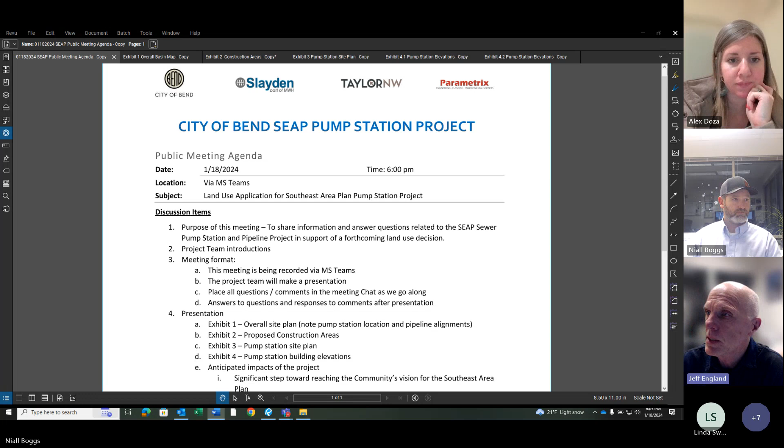We went through an alternatives analysis looking at different pump station locations. The city decided that's the preferred location because it serves more area in the basin than any of the other locations we had looked at.

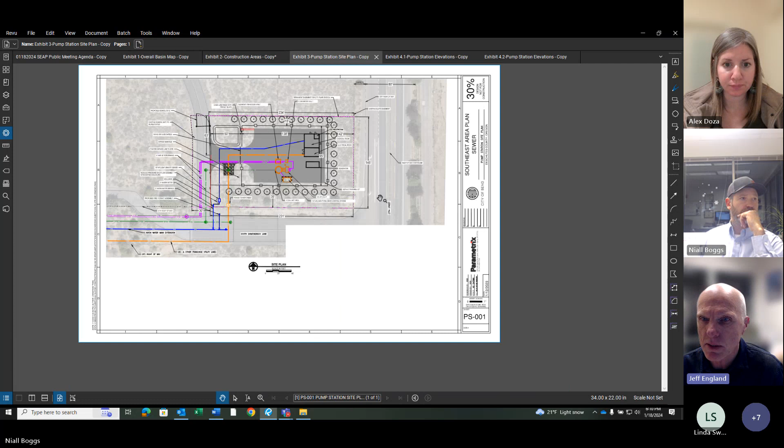So zooming in even further now, we're at the pump station location. What you're looking at is our site plan that we're going to be submitting as part of our land use application to the city.

Access to the pump station for maintenance vehicles will come off of 27th to South Diamondback Lane, but the main entrance will come off the existing bus loop, which is basically a driveway that comes off of South Diamondback Lane.

Most of the site will be paved to support operations and maintenance vehicles when they're working at the pump station. We're showing fencing around the pump station, preliminary grading and landscaping, and we'll have a landscaping screen all the way around the site.

We're showing the pipes essentially coming in and out of the pump station, gravity and pressure sewer lines, as well as an Avion water line that we'll need to run in there to provide service to the pump station site.

So the orange circular area down at the bottom, that's the pump station itself. It'll be below grade. In the upper right, the black bold outline is a building that contains equipment, controls, et cetera, to control the pump station operation. It's got a chemical room in there for inducing odor controlling chemicals and other things. So that is the site for the pump station.

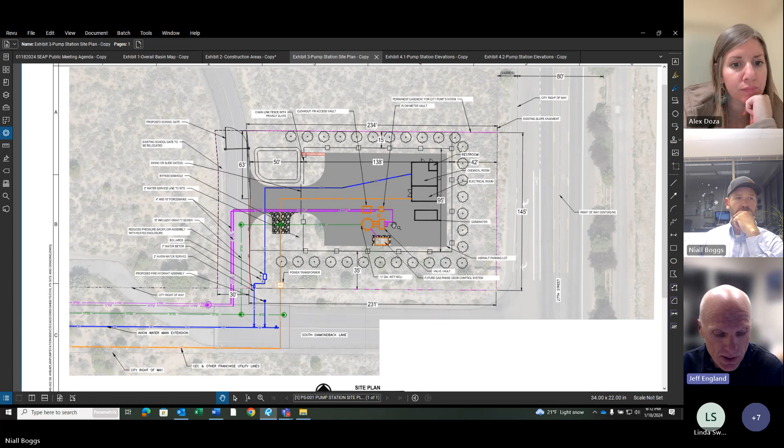And then let's take a look at the building elevations that we have so far.

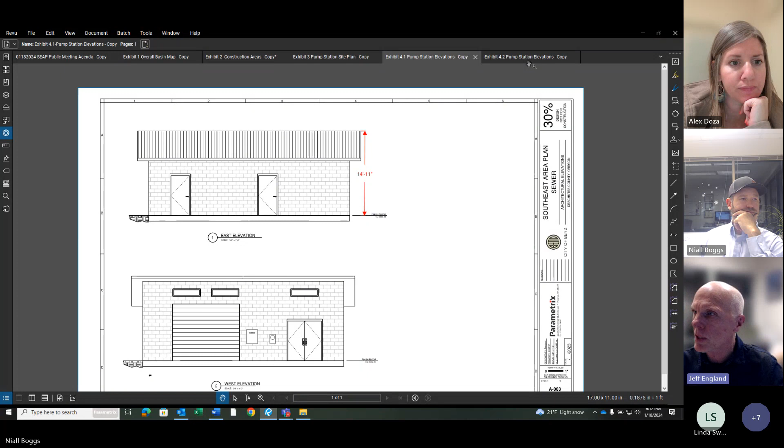The building itself will be a CMU block wall. We're anticipating doing something similar in architectural style to the school itself, since it's located on the school property. We thought that would probably be the best fit.

We're looking at the different elevations and the respective heights of the roof for the building, which is roughly 10 feet on the low side and almost 15 feet on the high side, just to give you a sense of the scale of the building itself.

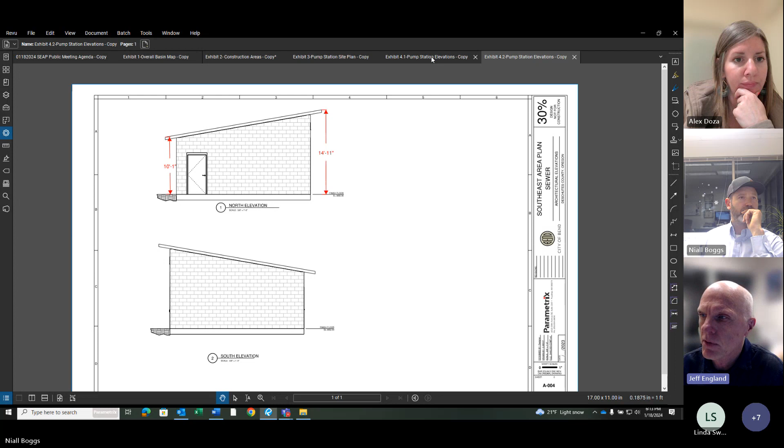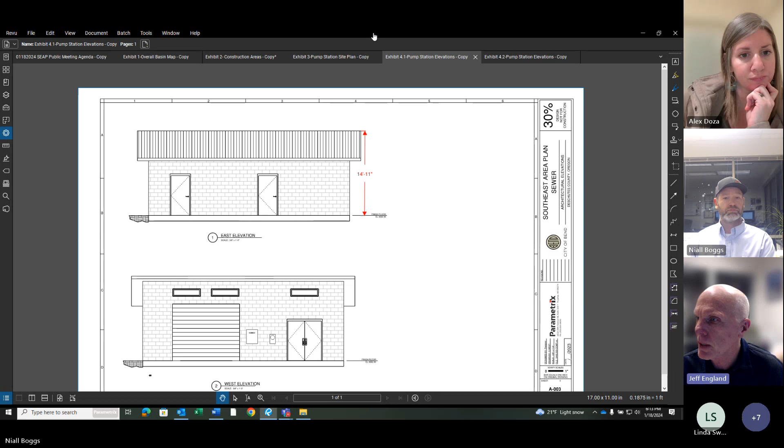That's all I have for the exhibits. One of the things we wanted to talk about as well—let me pause for a second. Niall or Alex, do you have anything to add to that?

Thanks, Jeff. No, not really. The only thing I would add—I think you glossed over it—is just so everybody understands, we're at about the 30% plan level right now, so these are subject to change as we learn more information moving forward. Probably not significantly, but just so we're aware.

Just a couple features I'd like to note about the pump station. This will be a 6-foot high chain link fence with vinyl privacy slats, along with some vegetative buffers. The only other above-ground feature—most of this stuff will just look like a flat square or circle of concrete—is a backup generator for the pump station next to the building. So that's the only other above-ground feature, but again, it'll be behind fence and vegetation, so there won't be a whole lot to see from the road.

We don't expect much in the way of trip generation. There's not going to be much traffic to this—it's fully automated. There will be times when operations and maintenance personnel and vehicles show up on site to do work, but it'll be pretty infrequent. So there won't be much traffic generation at this site.

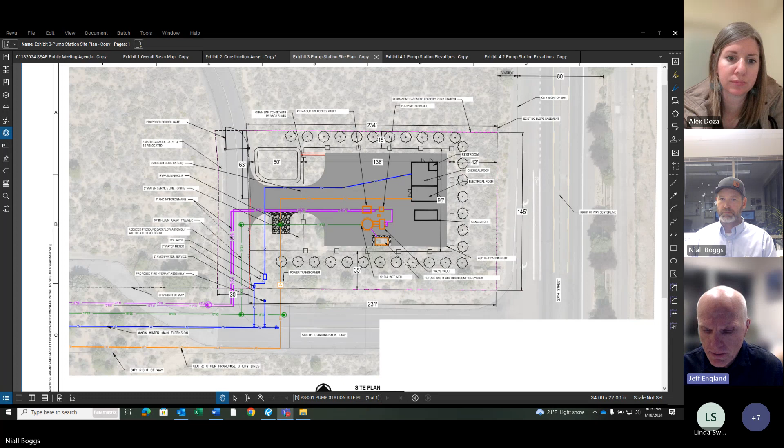One of the things I wanted to go through are some of the anticipated impacts of the project. First, I've got a couple of positive impacts. This is a significant step toward reaching the community's overall vision for the Southeast Area Plan.

We think that putting the sewer in was the big challenge for all the folks with property out here looking to develop, including the school district and others—that was the biggest hurdle. So the city stepped up and decided to expedite this project, moving it to the front of their CIP, capital improvement plan, and here we are moving forward with that.

It accommodates a future elementary school and other development in the area, as I mentioned.

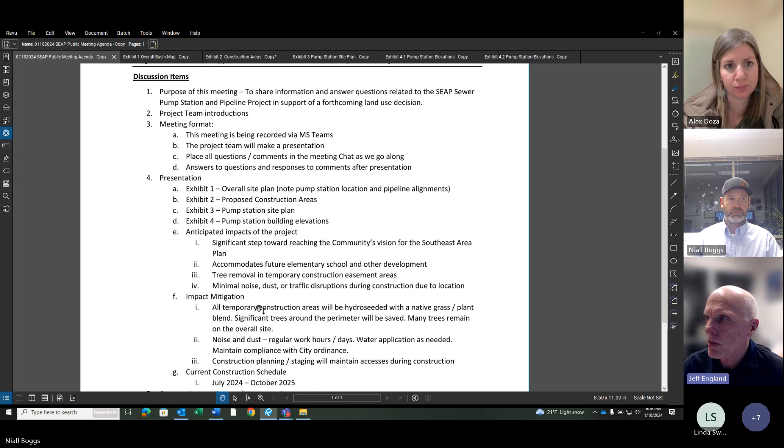Other impacts include tree removal associated with the construction easement areas. We looked at some of those areas and could go back and take another look at that with the school district. Those areas shaded or highlighted in green—most of the trees and vegetation on those sites will need to be cleared to allow for the vehicles, materials, and equipment needed to construct this project. So there's two different areas.

Most of the pipeline work will probably take place from the lower area, shown on the bottom part of the screen here, and the pump station construction equipment and vehicles will be in the area shown on the upper part of the screen.

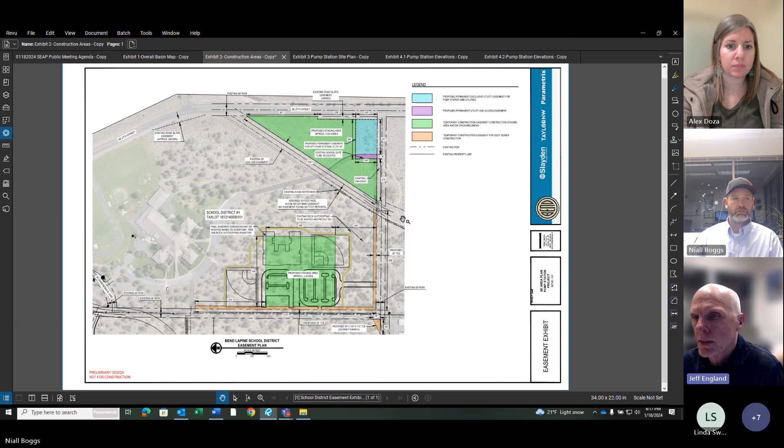We're trying to minimize traffic across the Trans-Canada gas line that runs through there—there are two large diameter, high pressure natural gas pipelines running through the site. We're working closely with TC Energy to make sure our crossings of their existing pipelines are done safely. Part of that discussion is to minimize construction traffic over those pipelines and reinforce the temporary crossings in some regard. We haven't worked through all the details yet, but we are working through that with them right now, just FYI.

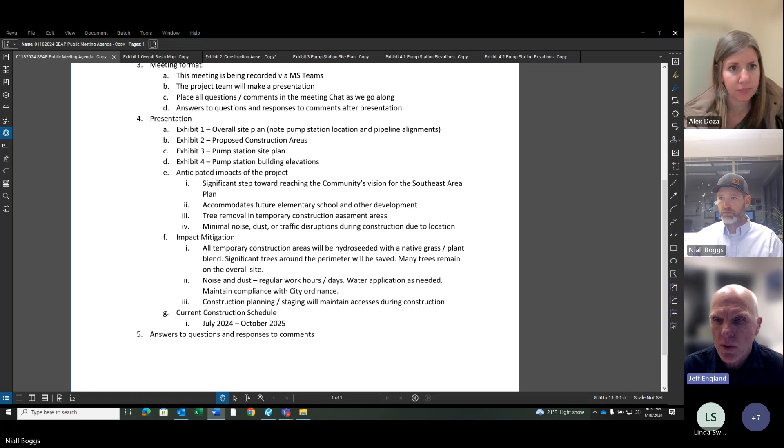So we talked about noise and dust. One thing I'll mention is that construction will happen during regular work hours and days on this project. We'll apply water as needed to keep the dust down, and as I mentioned before, we'll maintain compliance with the city's ordinances as far as those things go.

There are a couple of businesses in addition to the school that we're going to need to work with in terms of making sure that we maintain access to them at all times. There's the veterinarian's clinic and the pet resort, and we're talking with those property owners. At least we've given them a heads up that this project's coming and that we'll continue to coordinate with them and work with them.

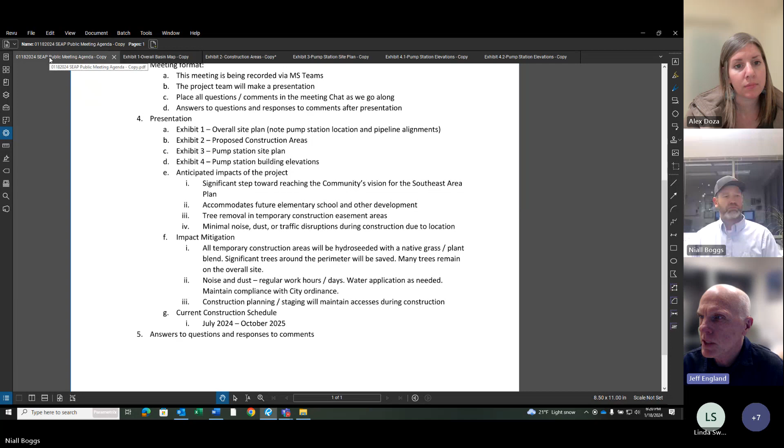Yeah, thanks, Niall. And to maintain access, we'll come up with a construction staging plan that allows us to construct segments of that pipeline, and provide access from the other direction while one area is under construction, then flip things around and change the access back the other way. So we've already started thinking through how we might accommodate that.

So the current construction schedule is slated for July of this year, so mid-July through October of 2025. That's where we're at currently. That's always subject to change too, depending on a variety of factors, but that's what we're planning for right now.

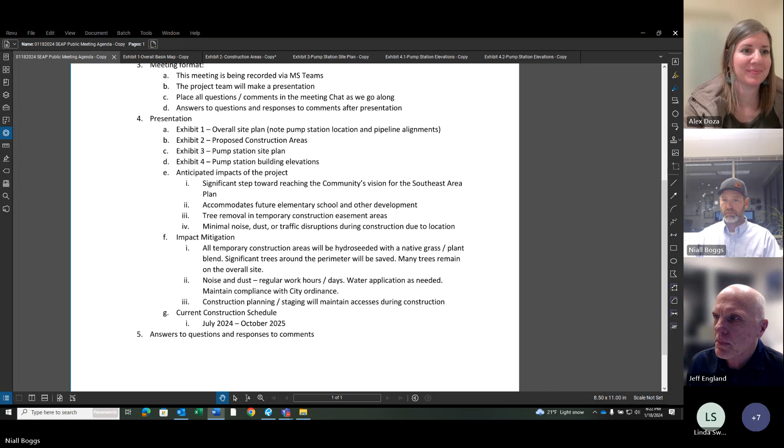So I've said a lot. Alex, Niall, if you'd like to chime in and add anything, please do so. Yeah, I don't have too much more to add on the project. I think you've described it pretty well. I would say if anyone has any questions to type them into the chat.

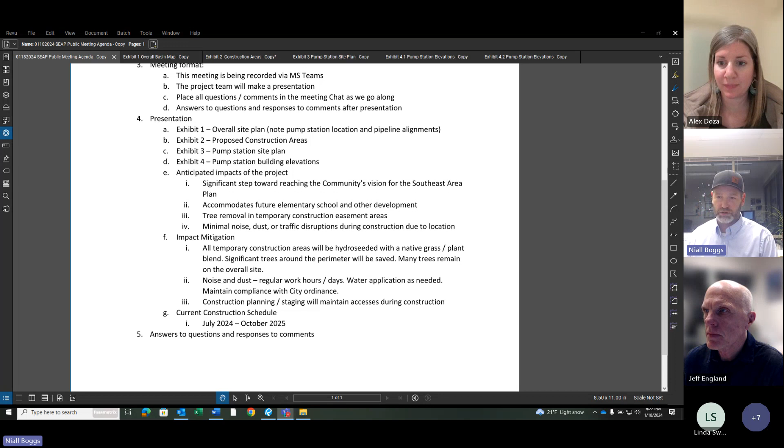So we got a question here from, looks like Sarah Moss. Is the construction related to the pump station only? No. I think I saw you jump on a little bit late, Sarah, but there is the pump station, but it needs gravity sewer pipes, which are going to start up here, feed down through some future rights of way, into some existing rights of way and down to the pump station, same coming in from the west, and then the gravity flow will come into the pump station, then it actually gets pumped all the way back up into the Ferguson sewer. So the construction will include all of these pipelines in addition to the pump station.

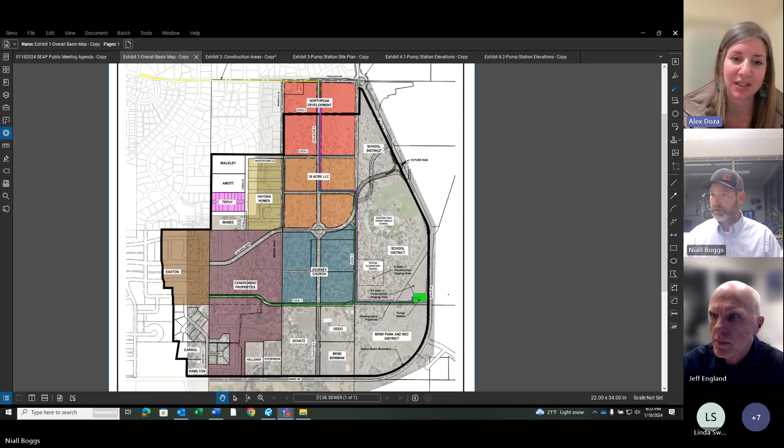And just to piggyback on that, for clarification, the pipe that's in right of way is not included in the land use portion of this requirement, if that makes sense. So just for purposes of, if you see the application, it's only going to include items on private property. So, but the construction, correct, will be what Niall just explained. So there's that nuance to it.

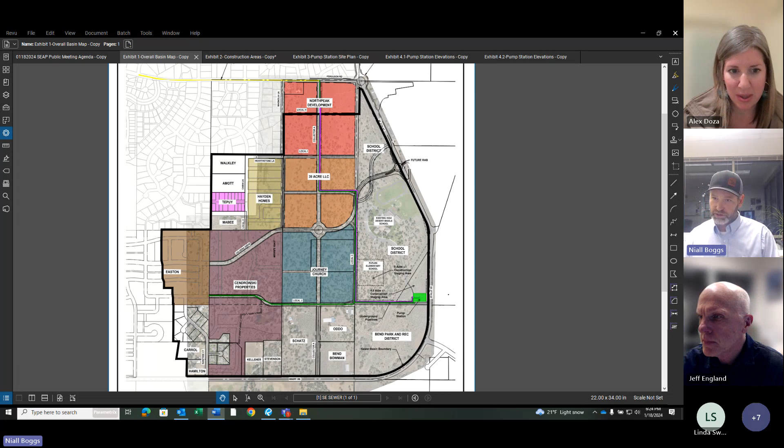Yeah, and then we have another question here from Jerry Jones. Do you have all the easements procured that would be required? And if not, do you see this as a risk to starting in July 2024?

Jeff: Sure, the answer is we do not have all of the easements procured right now. Right-of-way acquisition is always a risk to these projects. It's fairly typical, but to answer your question, yeah, it's potentially a risk. If somebody decides to hold out and doesn't want to dedicate right of way, that's a whole other situation. We're not thinking that's the case, we've been in close communication with everybody here, but you never know. So we'll continue to work through that and try to get the easements in place as soon as we possibly can.

There's another question from Sarah: what street is the east-west line, the green line? Right now there is no name for it. We're referring to it as Local J.

If we look at the City's Southeast Area Plan, there are designations for the different roadways planned through here, and this one is planned to be a local street, which is narrower than Collector A here, which is a bigger, wider street. So it doesn't have a name yet. There's an existing right-of-way that goes through to this point, and then heading west across the Cendrowski properties, that's a planned extension of that right-of-way the developer is planning.

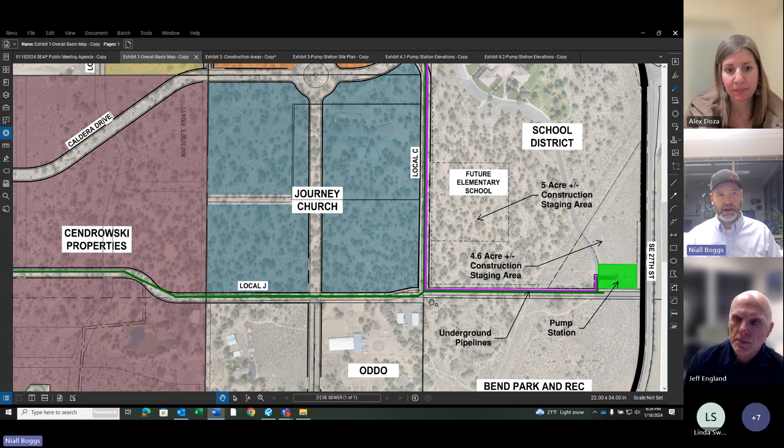For right now this street doesn't have a name. I guess technically this little tiny portion is actually referred to as Diamondback Lane - there's only a small portion of existing roadway that comes in here to the school's bus loop. But the existing road up here is also called Diamondback Lane, so it's a touch confusing, but it will likely not be called that in the future. Hopefully that answers your question.

We started calling it South Diamondback Lane. I don't know if that's right, but it helps us keep them straight.

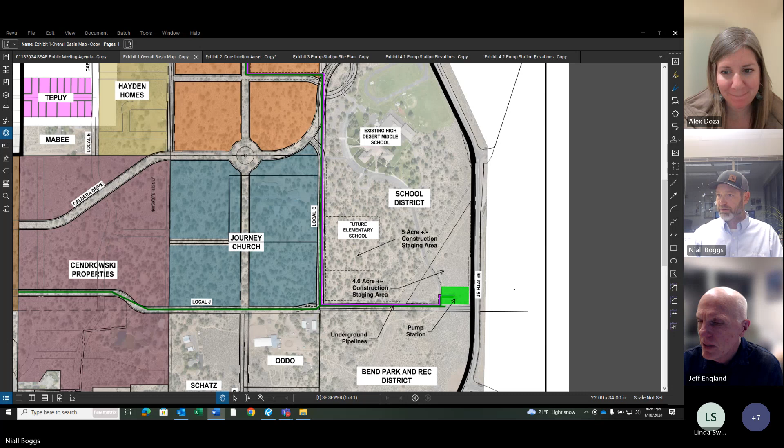Maybe another question coming in. No, looks like just thank you. So yeah, thanks Sarah for the questions, appreciate the interest.

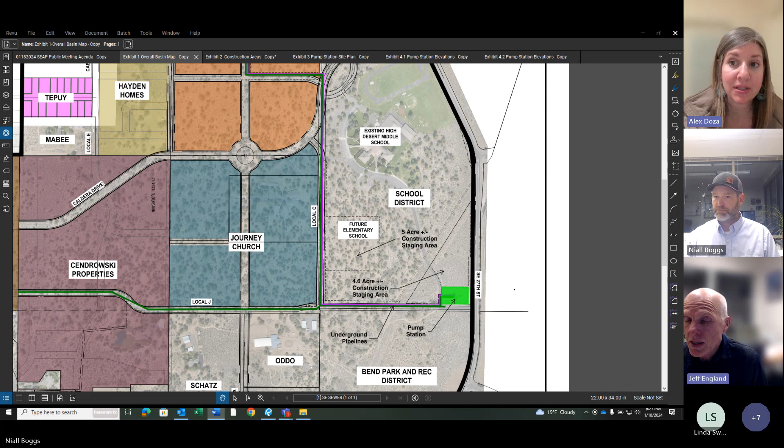The city also has a website, so everyone knows that it has contact information and some frequently asked questions. It looks like we've got a question that just came in from Jim Gutman.

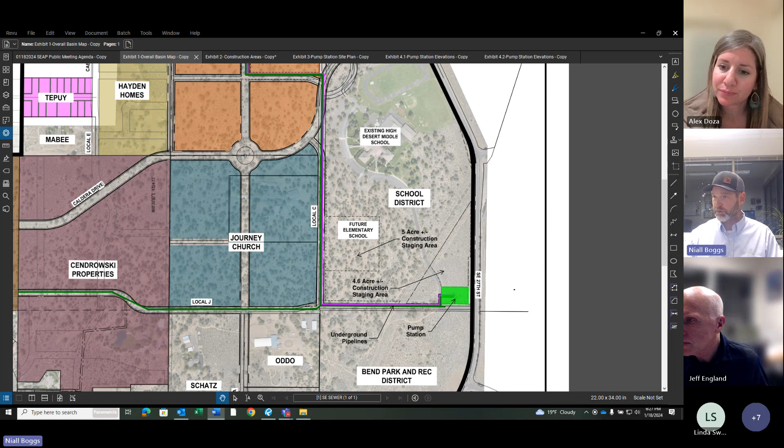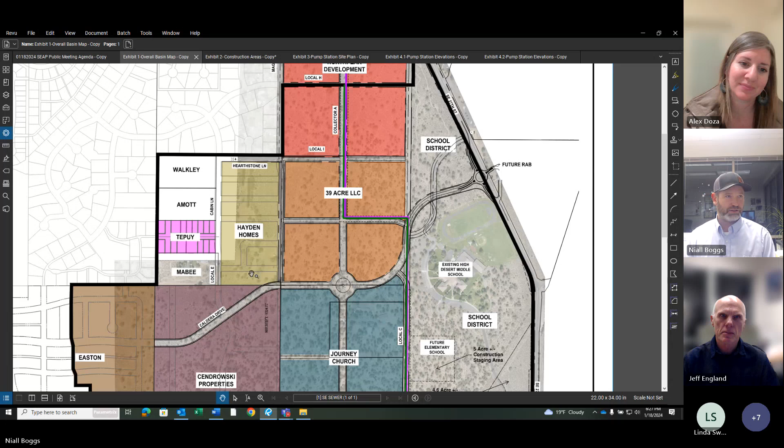Will the Hayden Homes development be running concurrently with this project? The Hayden Homes project is here. I'm not exactly sure on their schedule off the top of my head, but they are reliant on sewer, so they need to hook up to sewer to make their project work. There's a chance that they may. The one I know is going to be in that same time frame as ours is the Northpeak development, so Hayden would probably follow them, but depending on where they are in their land use process, it's really going to drive that.

Last time we spoke with Hayden Homes, and it's been a while now so things could have changed, I think there was going to be at least some overlap between the projects. So I would expect that, but again, maybe they push their project out. I'm not sure, but there could be some overlap for sure.